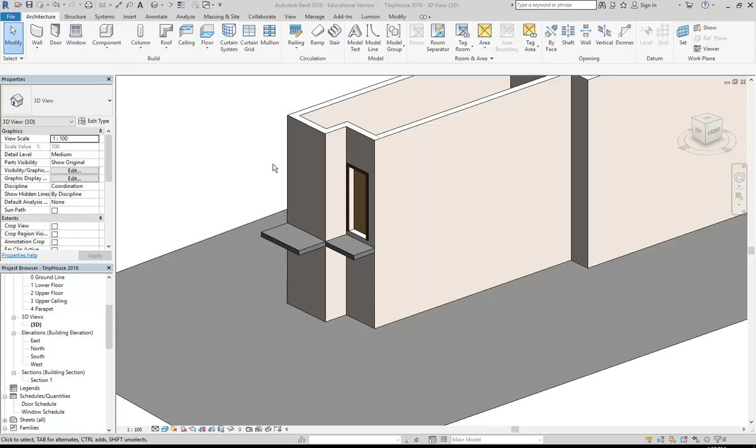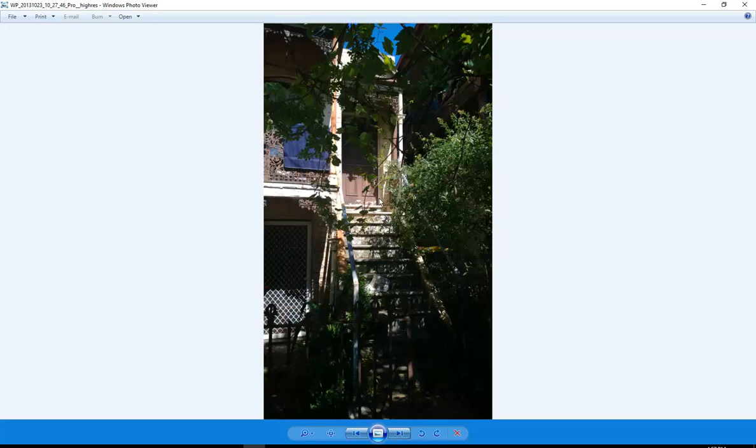Okay, so I've got those floors set out, and the main reason I put those in is so that I can then start to make these existing entry stairs. So, before I do that, I'll need to have a look at the levels. So I'm going to go to the south elevation so that you can see I've only put in the ground line and the lower floor level.

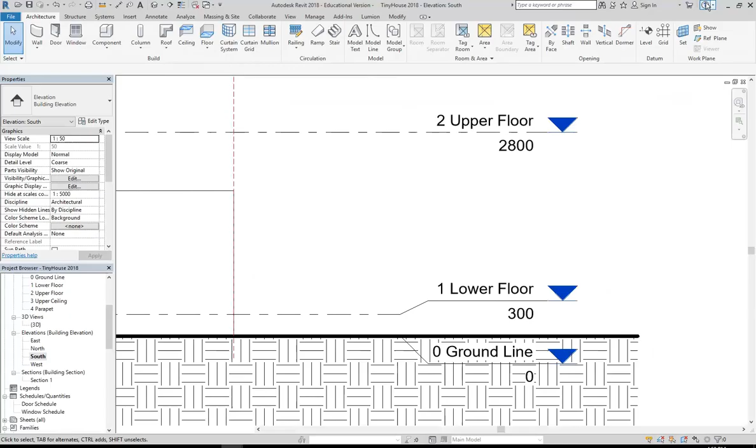But if you look at the drawing I gave you, you can see that I've got another level which I've just put over on the left-hand side there, because we don't need that for the whole project. I only really need that street level for the stairs. So I'm going to show you can make that a bit differently. Don't worry, if you've already made it, just keep the one you've made. But if you haven't made it yet, then maybe you might want to try it this way, which is to, again, just use the level tool.

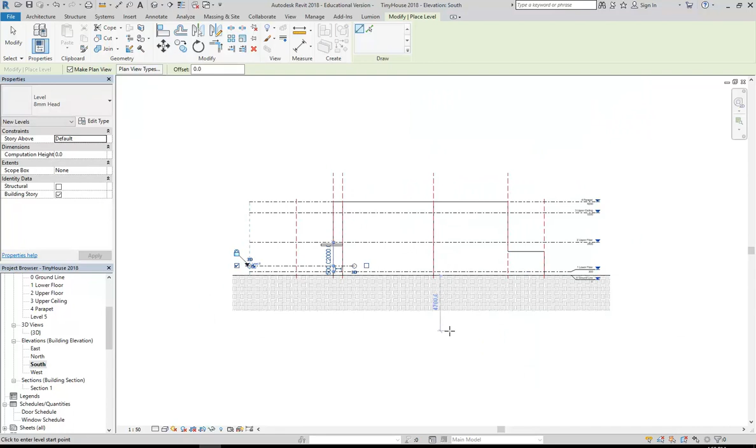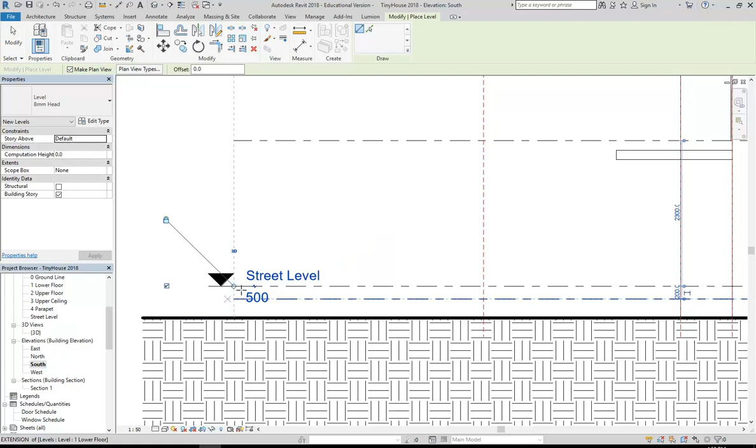But in this case, I'm going to draw it right to left, just so that the name goes over on the left-hand side and it's out of the way of my other levels. Okay, and so then, looking at the heights, it should be 500. So here, change that to the height, 500, and then I'm going to change the name to street level. And always yes. So I'm not going to bother putting a number there or anything like that, because this isn't one of my main levels. I don't really need to use this for anything much except for the stairs.

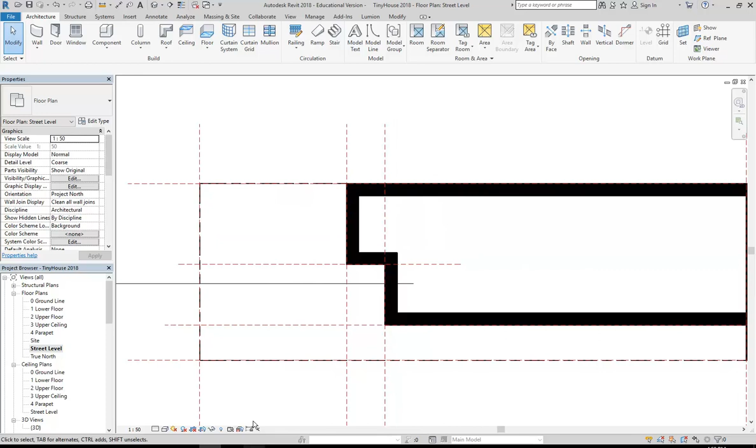So now back into my floor plans, you'll see I've got a street level floor plan. And I'm going to start there because that's where I want my stair to begin. So now, on the architecture tab, you'll see we've got the stair tool. So I'm simply going to click stair and then leave it on the run option, and then again leave it on that straight option. So notice how you've got these different shaped stairs. Over the holidays, if you get time, have some practice with those, because they all do good things.

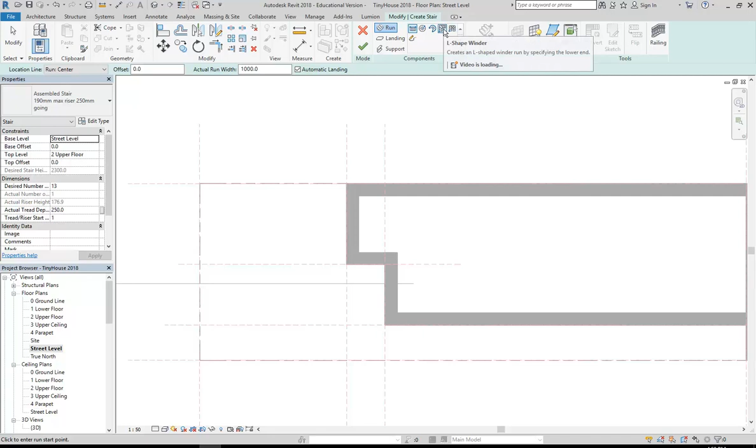But just to give you some tips there, the L-shaped winder and the U-shaped winder, they are just for winders. So I see a lot of people try to use those for an entire stair, and they're not really meant for that. And I'll just show you why. So if you do make an L-shaped winder, I'll just put one here. It gives you the whole stair in one go. But what it's really doing there is making winders for the whole stair.

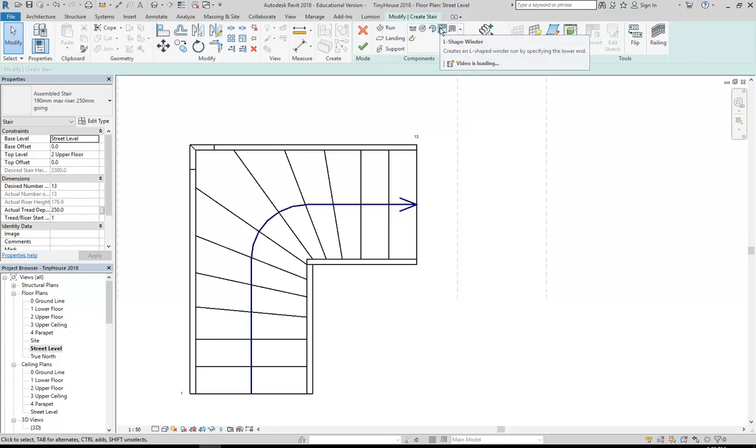Can you see how these angled stairs start before the point where they turn around the corner? Which is not correct. Okay, you would never build a stair like that. So they're not really meant for a whole stair. So watch out for those. It doesn't just mean L-shaped and U-shaped. Again, they are for winders. But apart from that, if I delete this one, apart from that, it's pretty intuitive.

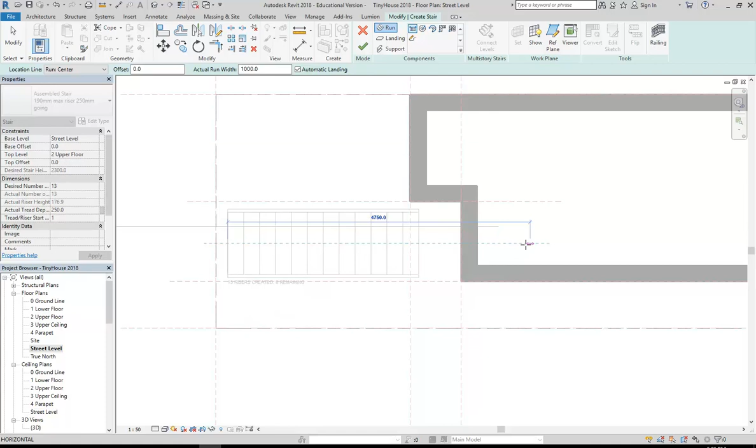So if I go back to the straight stair, we can easily draw this one by just clicking a point to start, and then I'll take it as far as it can go. So even if I go much further than I need to, notice how it's stopping at that point there just before my floor. So how do you think it knows how long to make that stair? Have you noticed something? Sorry? That's actually spot on. Yeah, it's pretty close.

So yeah, that's right. The level I started on was street level. So it's obviously picked that up from the view, the plan that I started drawing in. But then if you look over in properties here, you can see, well, that's the base level. But then it knows, pretty clever, from the next level, which is upper floor, where the stair is going to finish. Now you can adjust that if you want it to finish on a different level, but often the next level will be the level you want it to go to.

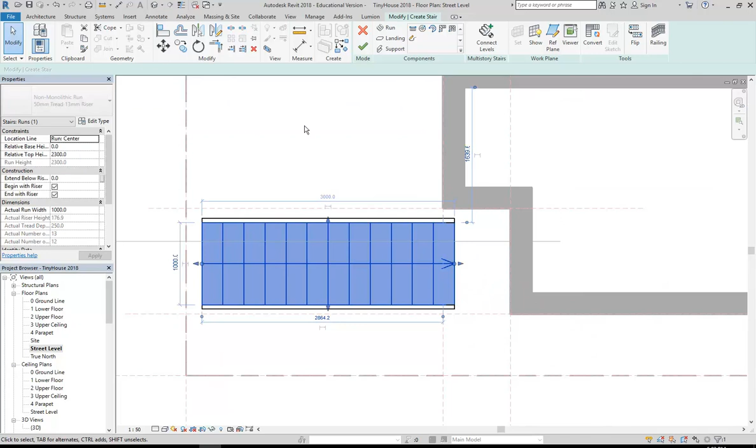And so here it's worked out that to go from street level to upper floor, it needs this number of stairs, 13. Which is good. We can easily do a straight stair that long. So that stair is basically done. And I'll position it again though. It's too far to the right, so I can select it now, and then just use the move button, snap to the last step and then move that back to where I know the floor is, which is on that reference plane.

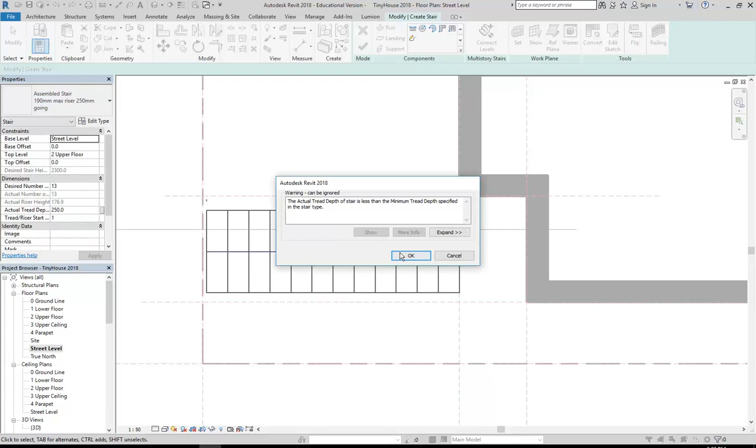But then before I finish it, in properties over here, I'll change that to monolithic stair. And you can see then it's going to give me a warning to tell me that the depth of the stair is less than the minimum tread depth, so I'm going to click OK and it'll fix that for me.

Yep, so when you select it, don't select it actually, so with nothing selected, you'll see in properties you can change it to a different stair type, and that's where you'll find monolithic. So don't worry about this message about the actual tread depth. It's telling us that it's going to fix it for us, and that's fine.

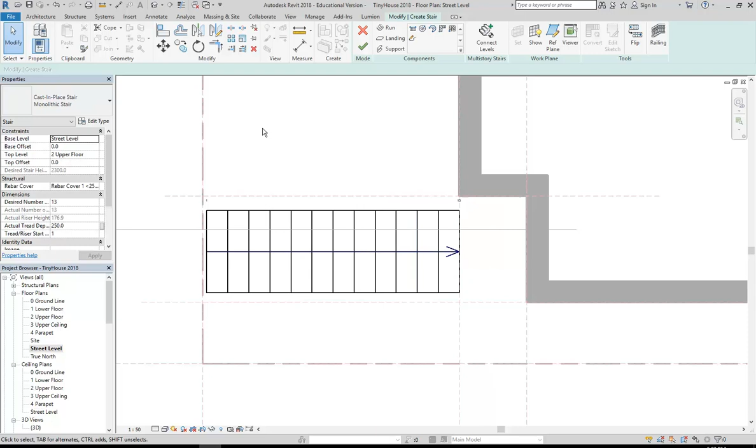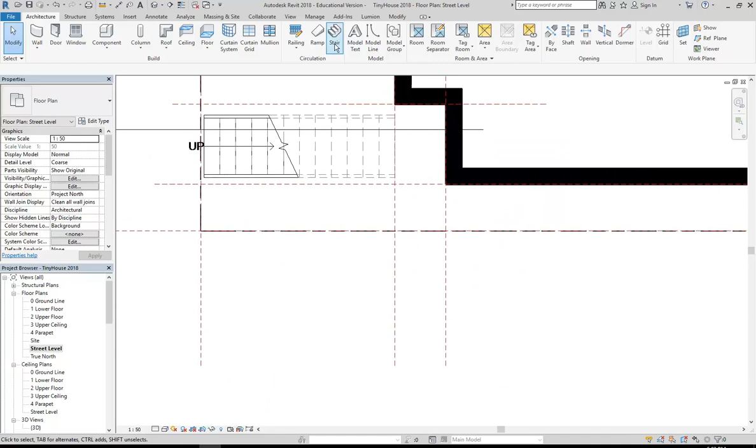Okay, so if I finish that, when we have a look in 3D, you'll see that's made the stair fairly well. But I'm going to go back and show you some other stairs. So if we go back to, again, street level. So just to give you an idea more generally how the stair tool works, I'll click on stair again. And notice it's picked up the same levels.

So I'm going to just this time click a start point and only go along a certain distance. So maybe in this case 6 rises. And I'll stop there. And then I'm just going to start a new point over here to the right and below, and then come down and take it as far as it can go. And notice it puts in the landing automatically. So again, yeah, so it's great. It really is clever. So if I can finish that, have a look at it in 3D.

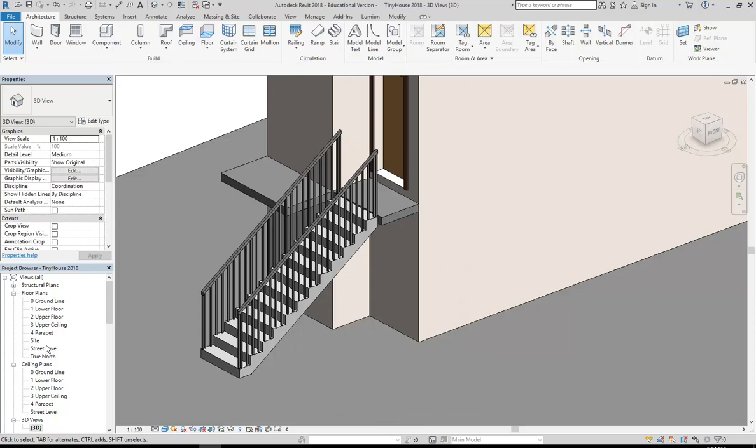Let's make this thing. Yep, sure. So I'll delete that. And so back into, again, I'll just do the same level again. So clicking on the stair tool. Now, there are options for changing this. You don't always have to draw with the centre line, but that's what I'm doing at the moment. So I'm drawing a point there for the start of my stair, and you'll see when it comes along, that's going through the centre line of that stair. So I'll click where I want that first flight to finish, and then the next point is going to be the centre of my next flight of stairs.

And then coming down, again you can see it's drawn through the centre line, and I'll click again to either finish it, or I can finish before the end and then come along to the next point where I might want another flight, and then again take it as far as it can go.

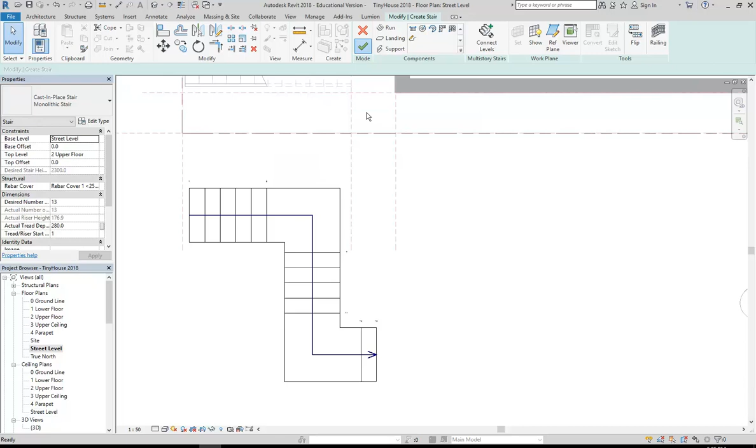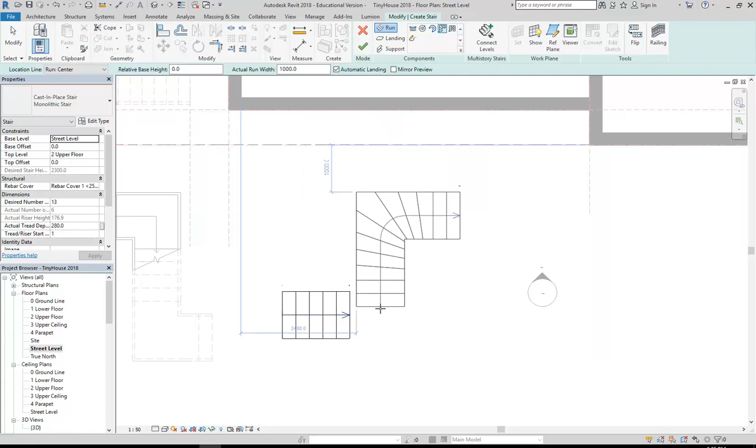You can, yeah, absolutely. So if you go back, okay, so back to street level, it's a bit more involved, but basically here you can, with the run tool, draw a straight line, and then you can go to winder, and, oh, sorry, you've got to change your heights. So we'll go through that later. You've got to set up some more levels for that, or at least put in some offsets. Well, we'll get into the other options as well.

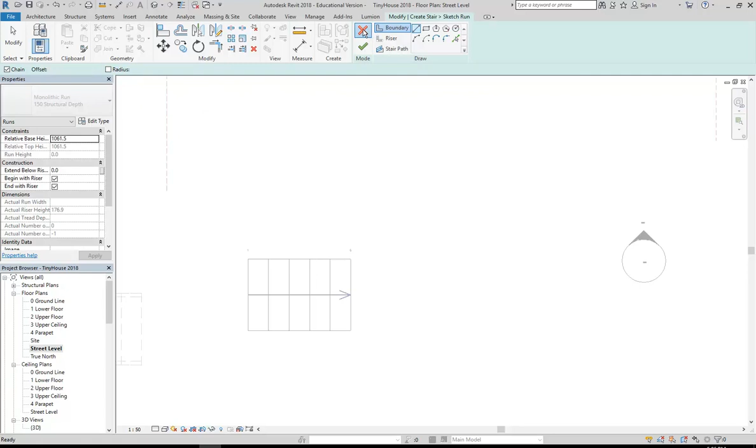So you've got this option for sketch. If you go to create sketch, then you can draw any shape you like as well. So again, we'll go through those options later. There's lots of different ways of making your stair shapes. But yeah, the L shape and the U shape winder, you've got to do a bit of extra setup first to get them to work properly.

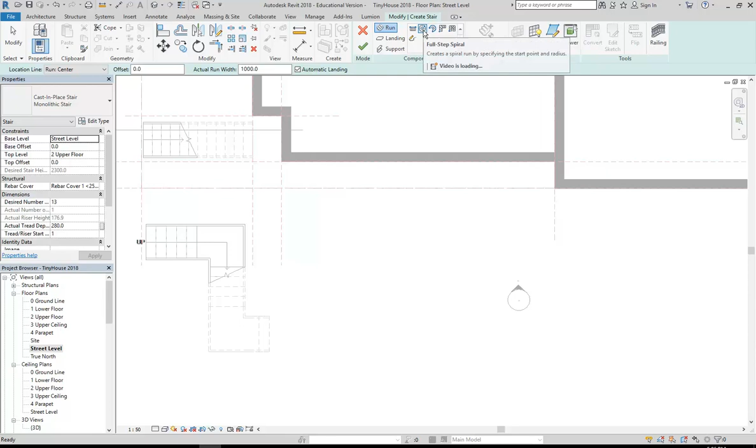But what I will show instead of those is the spiral stairs. So you've got these two options for full step spiral and centre-ends spiral. So they're both really good. So the full step spiral, you just need to give a centre point, come out and give the point for, again, the starting point of that first step. And I didn't come out far enough, so we'll just try that again. Spiral stairs need to be a certain size.

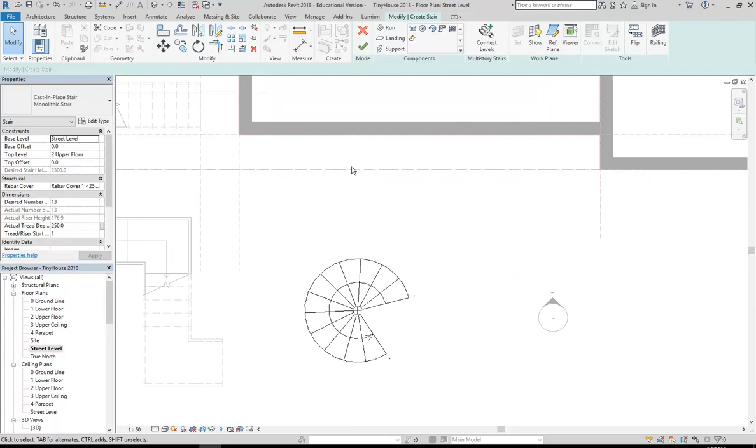Also because it's monolithic, we have to try some different properties there, so I'll change the tread depth, that should make it work. Yeah. Okay, so there's often some adjustments you need to make in properties to get these things to work, but that is a really good tool for most spiral stairs. Okay, so you can experiment with those things, and it's a really good thing when you're trying to set out your designs.

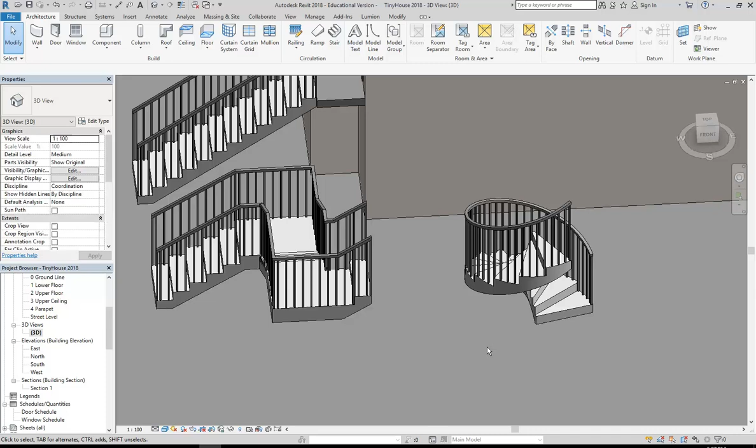Oh, SketchUp's terrible for stairs. I know, it's the worst. Can you import a Revit stair into SketchUp? Oh, of course, but it's better to go the other way. You can bring SketchUp stuff into Revit. Yeah. But you can export any of these things. Actually, sorry, no, you can't because you won't have the plugin.

Yeah, there is a plugin that I've got that only cost me about $50. I had to pay for it, but it's worth it. So for $50, you can make perfect SketchUp models from Revit. Just search for the plugin, and it works perfectly. But yeah, no Revit file. So it takes Revit and, sorry. Oh, I've forgotten the name of it. Just search for Revit, convert Revit to SketchUp, and you'll find it. Yeah, it's worth it.

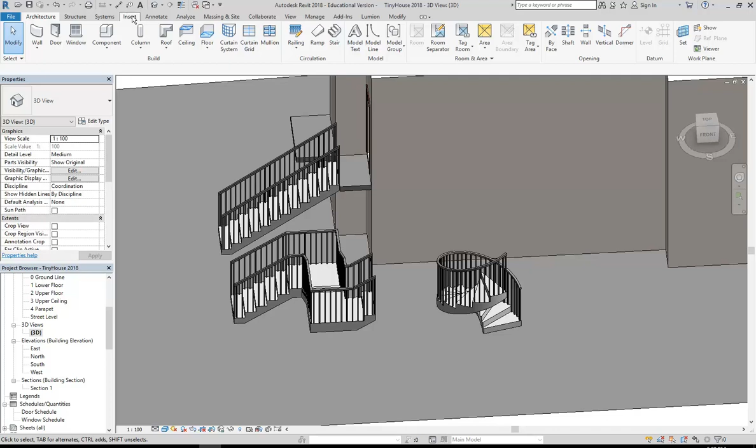Oh, Revit imports SketchUp natively. So on the Insert tab, import CAD, and then just change it to SKP.

Yeah. Oh yes, I will. So have a go at that. So at least try to get that main stair in there, the entry stair, and then if you get time, experiment with the stair tool.